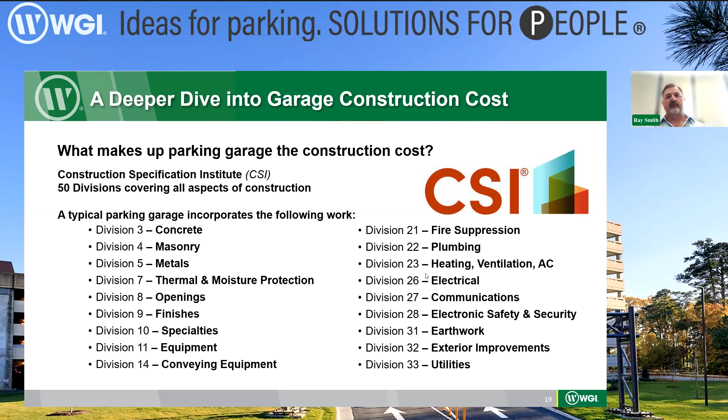The CSI 50 division specification system is how most projects in the US are bid, and those of you that are in the design industry or have been involved in construction projects are probably familiar with this. Each one of these divisions covers a different type of building component: Division 3 concrete, Division 4 masonry, 5 metals, and so on. The ones listed here on the screen generally make up the components of a garage construction project.

So why do we want to think of it in terms of the CSI format? Well, if for no other reason, the standard billing process for construction projects is to use the AIA, the American Institute of Architects, payment forms G702 and G703 for a contractor to bill a client for work, and the AIA forms are organized in accordance with the CSI format.

So everything kind of meshes together there, and this is just an example of the continuation sheet, the G703 sheet, from a typical garage construction project, and you can see how it's broken out. This one is a precast project, and he's got numbers for double T's and shear walls and slabs and so on, all under Division 3.

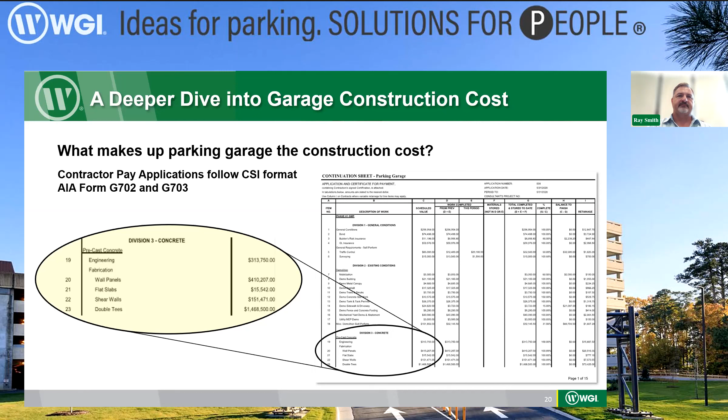So how do those different components break out in relation to the overall cost? Well, no surprise here. Concrete, everything associated with concrete, the formwork, the rebar, the actual concrete material itself, various accessories, post-tensioning systems, precast if you're buying precast, makes up 40 to 50% of the vast majority of parking garage projects. Everything else, as I'll go through, is pretty small potatoes compared to that big number.

Masonry: for garages, we're not doing a whole lot of masonry. It's usually just for a building support room enclosure, like an elevator equipment room, or an electrical closet, or a fire riser room, something like that. Metals: this component doesn't cover the rebar and the concrete. The rebar and the concrete is part of the concrete number.

The metals would be any kind of miscellaneous steel that you have, elevator hoist beams, ledge angles, sills. If we have any kind of roofing system with a metal roof, bar joists or steel deck. And occasionally we get into aluminum handrails, and most handrails, guardrails and stairwell metals fall into this category. It's about 2 to 3% of the overall price.

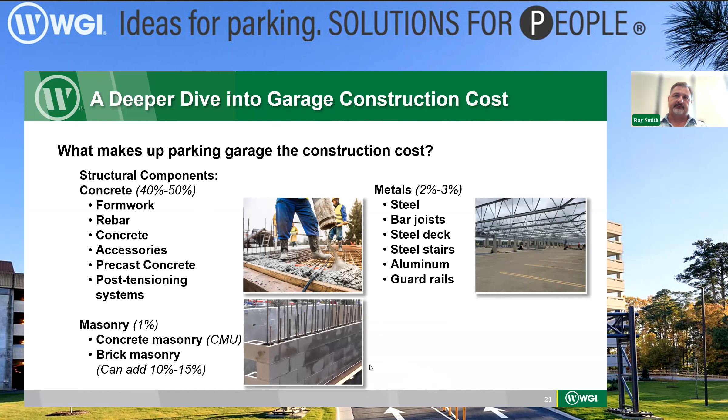Durability components: waterproofing is the major durability component. There are durability components associated with the concrete mix, admixtures and air content and all that sort of thing. But in terms of the waterproofing systems, it's 1 to 3% of the overall cost, and this would be your joint sealants, your expansion joint sealants, your penetrating sealers, any sort of deck coatings and membrane systems, roofing, flashing, all that sort of stuff.

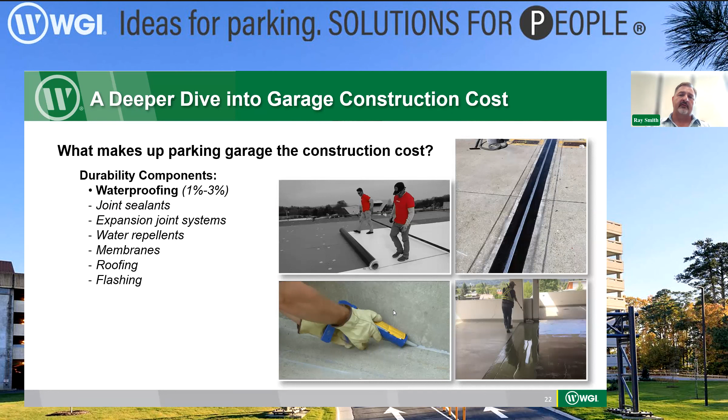And there's a little bit of a cost differentiator between precast and cast in place. A precast deck is going to have a substantially larger number of joint sealants to install and maintain over the years. Something to consider when you're looking at those.

Doors and windows. Depending on how much glass and curtain wall type facade treatment you might put on the garage, that can amount to a fairly significant cost, 5 to 10%. Generally speaking, in environments where we have freezing and thawing, we want to keep the moisture out of the stairwells. We always want to try to keep the moisture out of the elevator shafts. That can be a major issue, as our restoration guys can attest to.

And so, again, doors and windows can amount to somewhere around 5 to 10% of the construction cost, depending on how widely used they are. I guess if you're building a garage in Florida where it never freezes and you're doing open stairs and whatnot, maybe that's a much smaller number. But again, this is sort of a national average, if you will.

Finishes. When I say paint, I'm not talking about the striping paint, because obviously 99.99% of garages are striped with parking spaces.

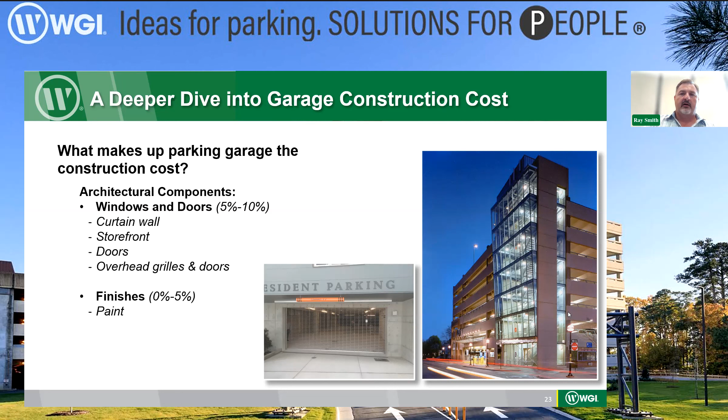The parking specific specialty components: signage is usually a pretty small piece of the puzzle, less than 1%. For a normal size garage, if I were to just plug a number in, I might do $10,000 a floor or something like that. Parking technology, depending on how robust your parking technology is, can get up to 1 to 2%. If you put a full-on parking guidance system in with individual space sensing and whatnot, it could be as much as, say, $500 a space these days, which is not an insignificant cost.

Elevators are expensive. 2 to 3% of the overall cost just for that single component. The other thing about elevators is elevators tend to be on the critical path in terms of schedule. It takes forever to get an elevator, and you really have to get those plugged in early in the construction process, and buy them out.

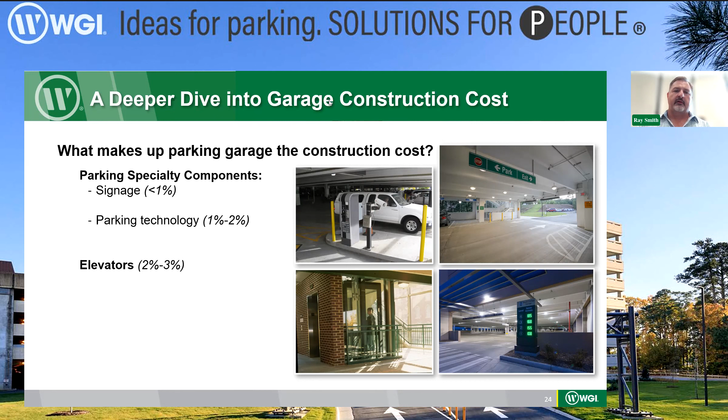Let's see, we got a couple more questions here. Actually, let me finish up my thoughts on the breakdown here.

Mechanical, plumbing, fire protection components. Really, in most garages, you're talking about dry stand pipes and floor drains. And so it's a pretty small component, maybe around 3% of the total cost. $1.50 to maybe as much as $2.50 a square foot for that.

I will say that for those of you that are operating in IBC 2021, the latest version of the building code has a requirement that all garages greater than 48,000 square feet now require fire sprinkling, regardless of whether they're open or enclosed. So that's a cost that will have to be factored in, and it is not factored into our cost analysis at this point. So just keep that in mind.

Other aspects of the mechanical system: there's always a little bit of HVAC to keep electrical rooms cool, or elevator equipment rooms heated. In certain environments, snow melt systems are required.

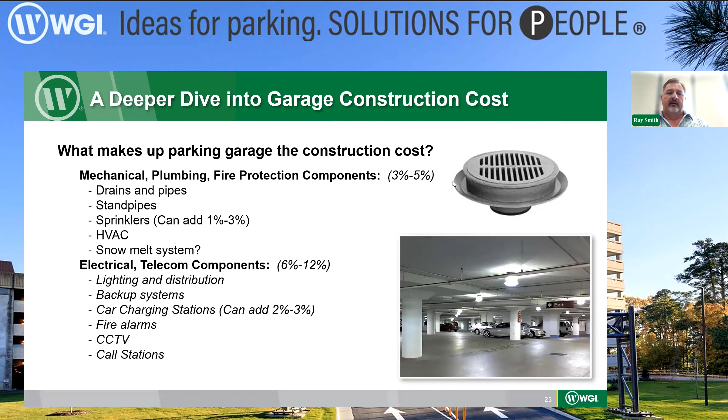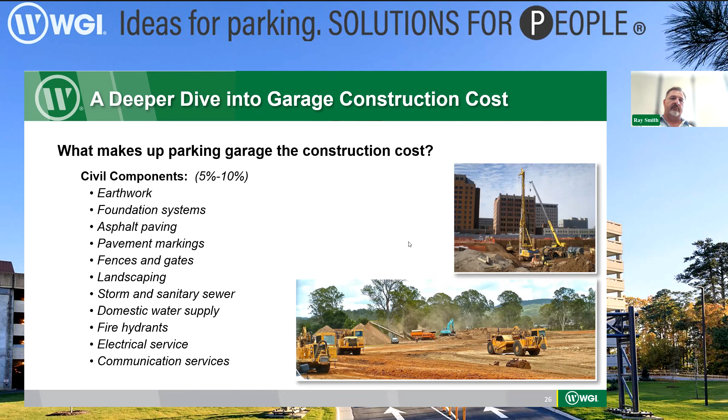And then the civil component, somewhere around 5 to 10%. This is demolition and earthwork and any sort of site improvements and paving and connections to sanitary and storm detention systems and all that sort of fun stuff.

And then lastly, once you've tallied all that up, you got to throw on a little bit for the contractor to mobilize. That's for him to get his forces out on site and put up a fence and get some equipment and pay a little bit of initial expenses to get his forces in place. And then general conditions are usually somewhere around 5 to 10%. That's the contractor's monthly cost for staff and for the trailer and for his vehicles and equipment dedicated to the project. Temporary signage, temporary water, insurance, et cetera.

And then on top of that, everybody wants to make a profit. There's nothing wrong with that. So 5 to 10% over and above. And that's the very high level breakdown of the different components that make up a garage's hard construction cost.

Now I've got some questions here. Let me see if I can answer them.

It's a question about what is my view of using 2 to 3 car elevators in the parking garage versus traditional ramp design. I assume you're talking about like a hydraulic mechanical parking. Well, I think this is basically referring to a hydraulic elevator, basically a freight elevator that would get a car up in the deck. I've done a handful of those. I could probably count them on one hand.

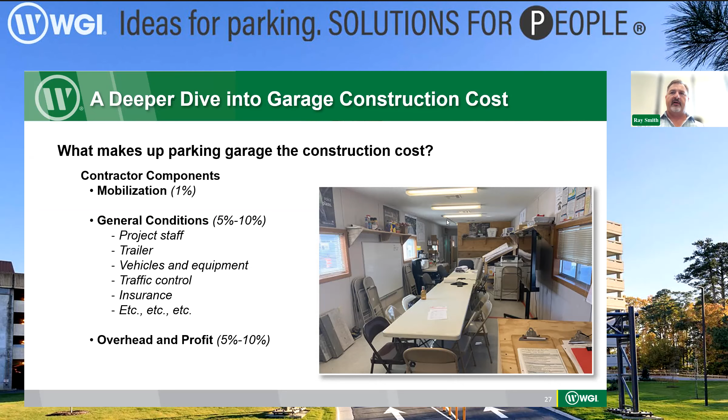Drilling down a little bit into the design fees, I'll kind of break down what makes up the overall design team fees. It starts with the prime consultant. That's the consultant who manages the project and is the point of contact for the owner. A lot of times that's the architect, but a lot of times on parking garages, that's the parking consultant. I know we've been prime on multiple garages.

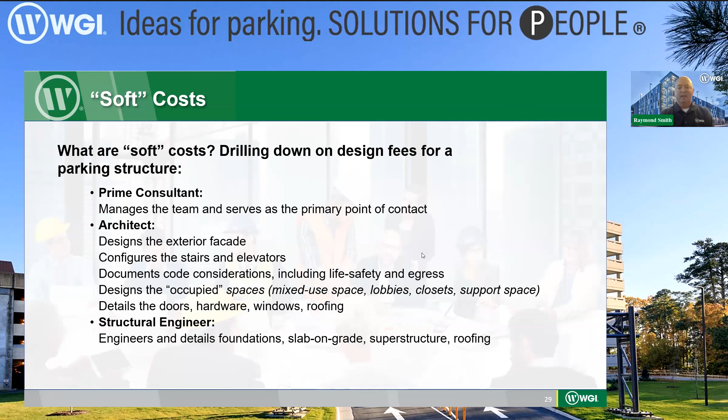And that's the foundations, the slab on grades, the superstructures and so forth. The parking designer, they're doing all of the parking layout, the ramping schemes, how you're going to circulate the garage, both vertically and horizontally. They're laying out all those ramping schemes and circulation patterns. They're also defining the wayfinding and vehicular signage in the garage. And as Rob touched on, they're specifying, which is what we do, all the parking technology items, being the access, revenue control systems, all the PARCS, gates, ticket spitters, and all that.

We also do all of the parking guidance systems that help you guide your way to your parking spot from start to finish. Then there's the drainage and durability designs. It's all about laying out the garage, since we're out in the weather and people drive in snow and ice and everything. We've got to lay out these garages to drain well. So that's a very important item, locating the drains and figuring out all the floor slopes to get the water to flow properly to the drain.

And then detailing all the waterproofing systems, being the sealants, the sealers, the traffic bearing membranes, those sort of things. And then durability design. It really comes into play the more northern you get. If you're where I'm located here in Indiana, in the Rust Belt, durability is highly important. Designing the life of the structure to match what the owner wants to get out of that.

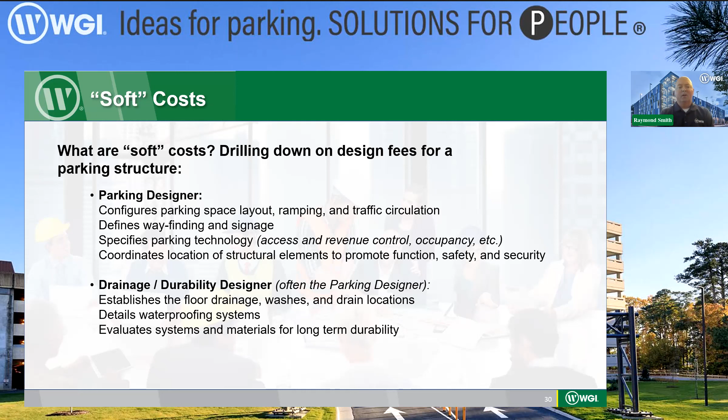A standard garage these days has a service life of about 50 years, but we've done them to have a 75-year life and also done a 100-year life. Usually those are below grade garages that have occupied buildings up above or designed for future bed towers or whatever it might be. So that's durability design. The MEP engineer, he's doing all the HVAC, the electrical, the lighting, and all the plumbing. He also does the fire protection.

The civil engineer, he's doing all the site civil items, you know, the roadways that bring you to the garage. So he's doing pavements, curbs, sidewalks, and that sort of thing. And then your landscape architect or designer, they're doing all the hardscapes, the pavers, stuff like that, and then all of the plantings that go around the garage.

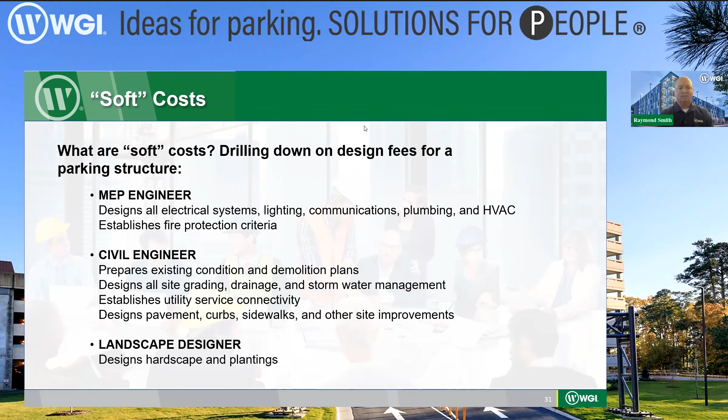All right. And this is kind of just a breakdown. This varies from project to project, depending on if you have a lot of civil or not very much civil, if you have a lot of landscaping or not very much. Complexity of MEP, those percentages will go up and down if it's an above ground garage or a below grade garage. But that's kind of the normal breakdown of normal design team fees for a parking garage.